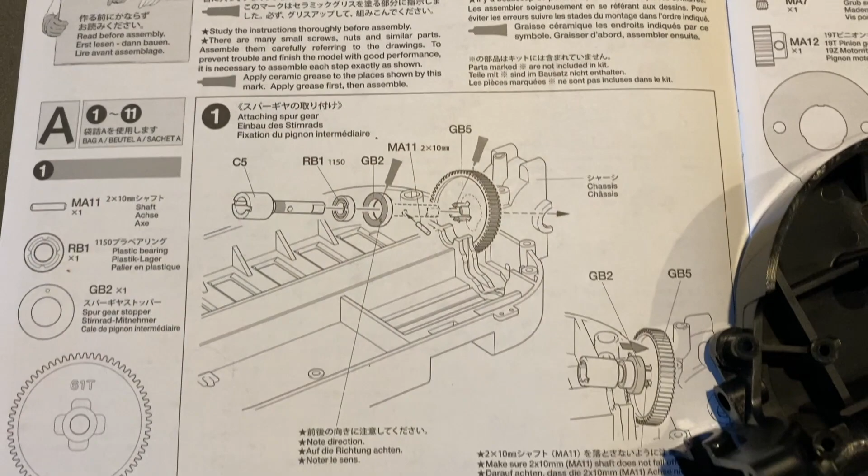In step 1, we start by attaching the propeller shaft and spur gear. As you can see, I've opted for an optional set of gears and propeller shaft.

Although the kit does come with a torque tuned motor, I thought I would step it up to a sport tune motor for a little bit of extra power.

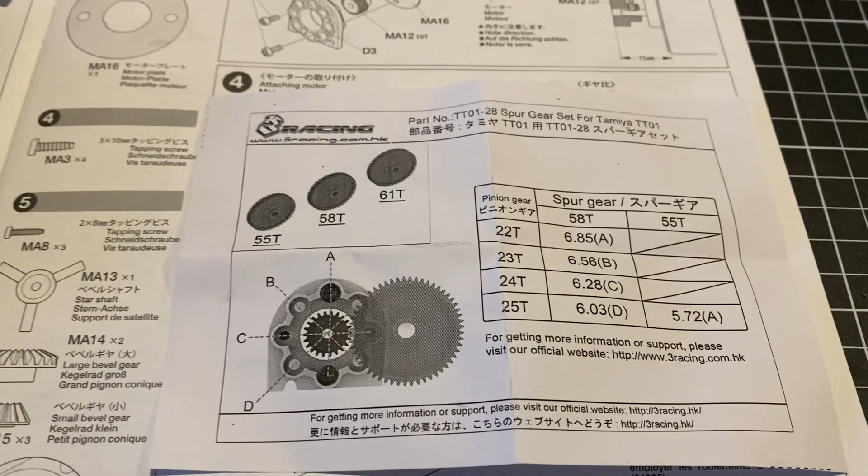As you can see here, we are setting up the rear differential assembly once we've installed the motor.

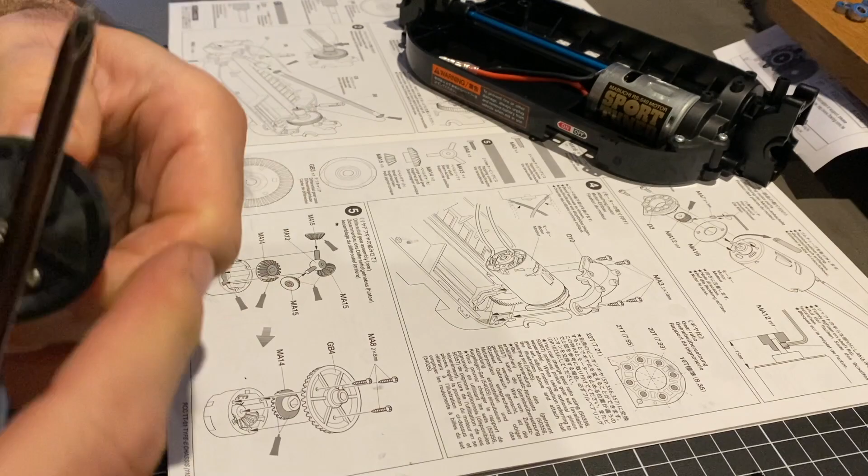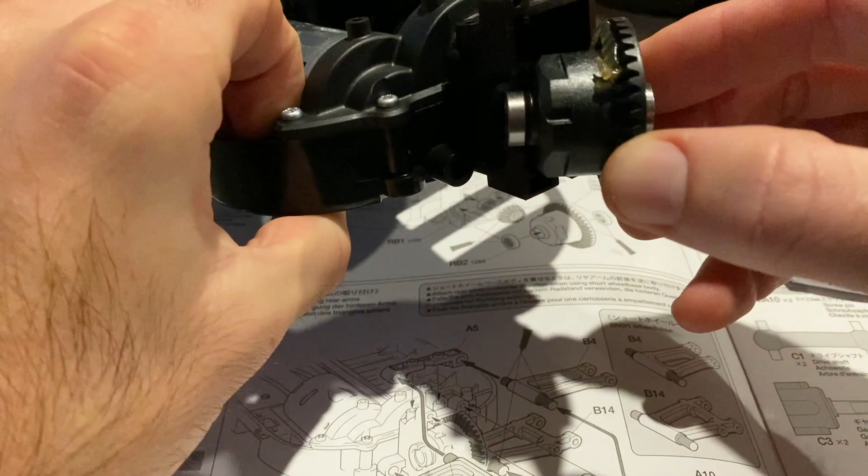The differentials go together quite easily with the bevel gear design. As you can see, I've upgraded the kit with ball bearings.

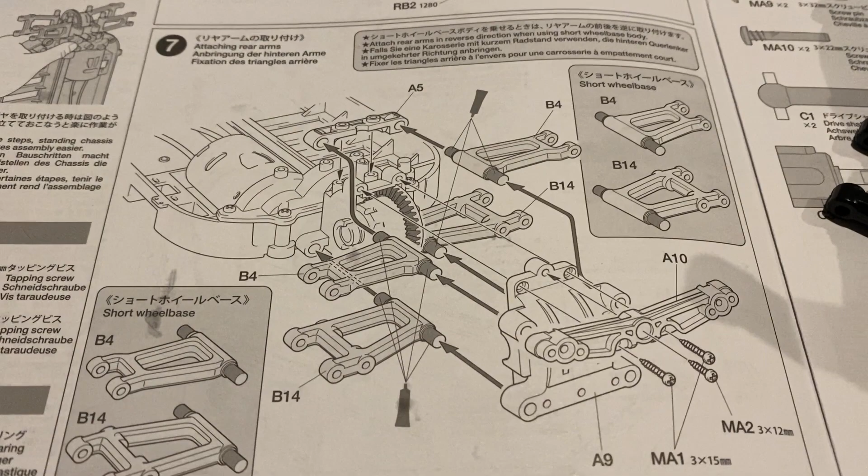Be careful when building the TT01 and TT02 chassis, as when you start attaching the rear arms, you need to ensure that you have the right wheelbase.

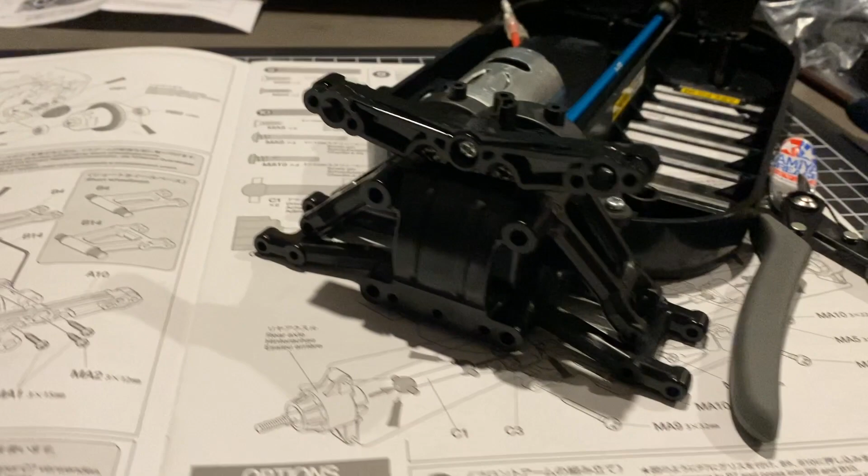Following attaching the rear arms and rear axles, you then attach the rear bumper in step 9.

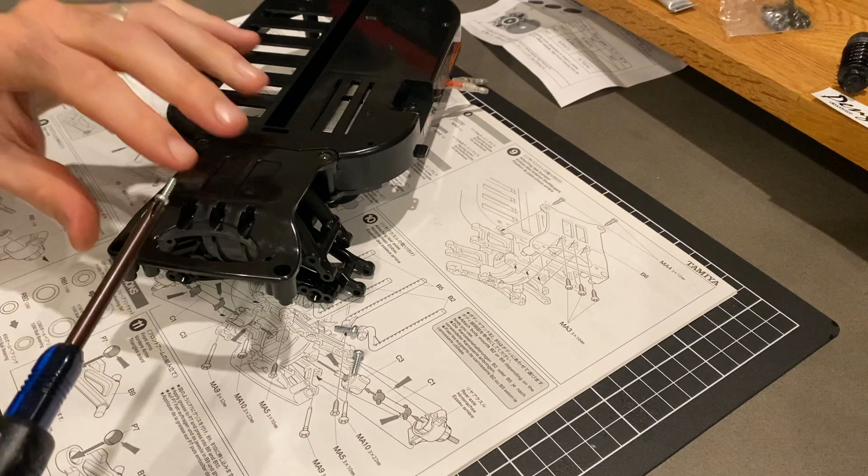Pay close attention in step 10. There's lots going on in this step when we're attaching the rear axles.

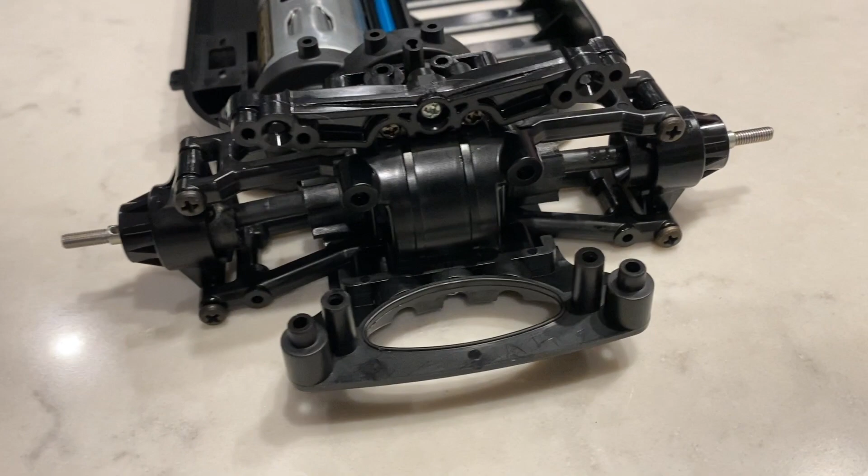So far the chassis has come together quite easily. Just need to make sure you pay attention to the instructions, but so far it's very much a beginner's build.

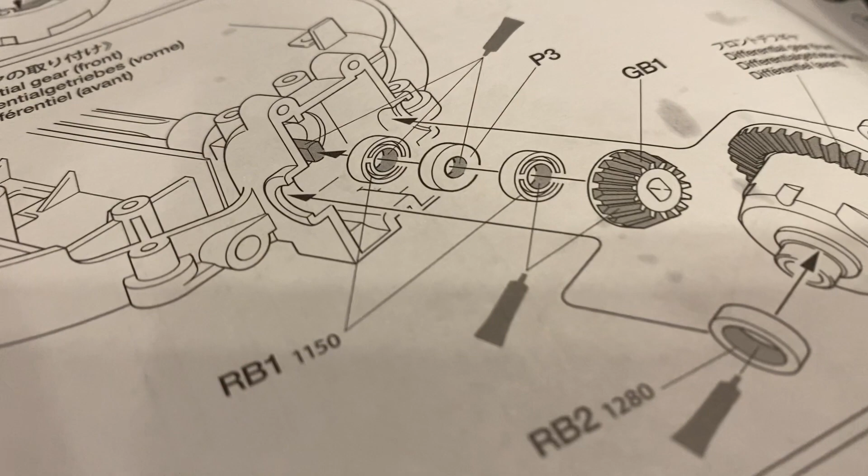Be mindful in step 13 everybody. Lots of people forget to put a bearing in front and behind the plastic P3 part, so make sure you do, otherwise the propeller shaft will vibrate.

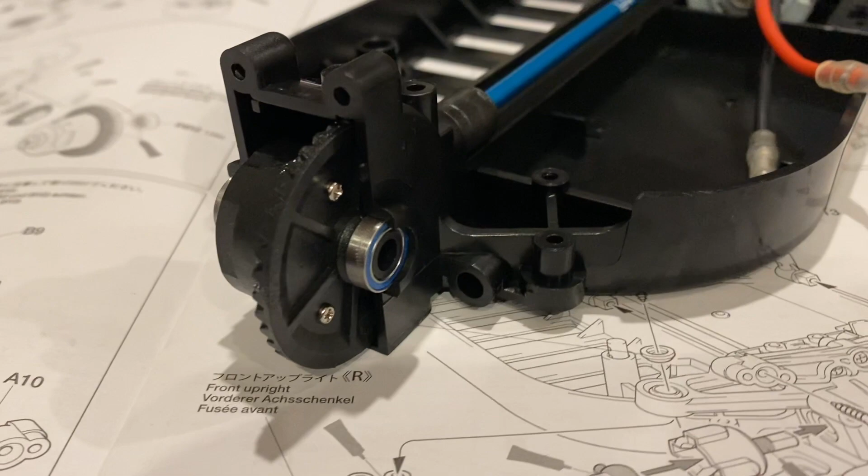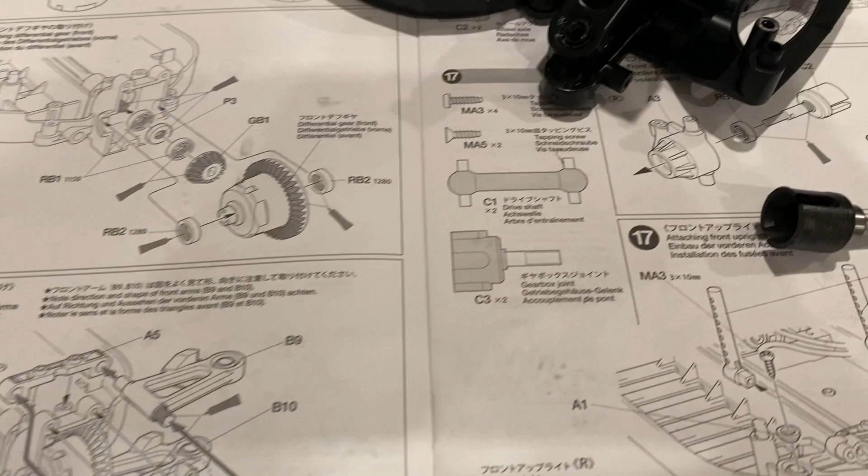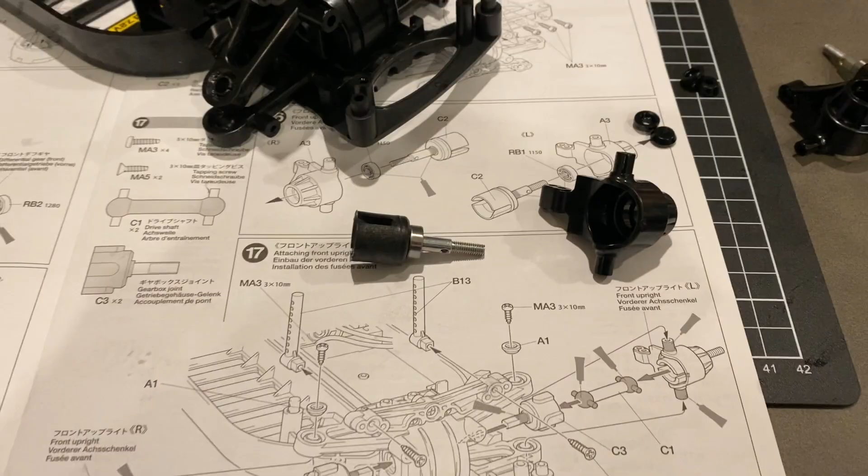So steps 14 right through to 18, we're just pretty much copying exactly what we did to the rear of the car and applying it to the front. So far this is a fantastic build and I would recommend it to anybody starting out in the hobby.

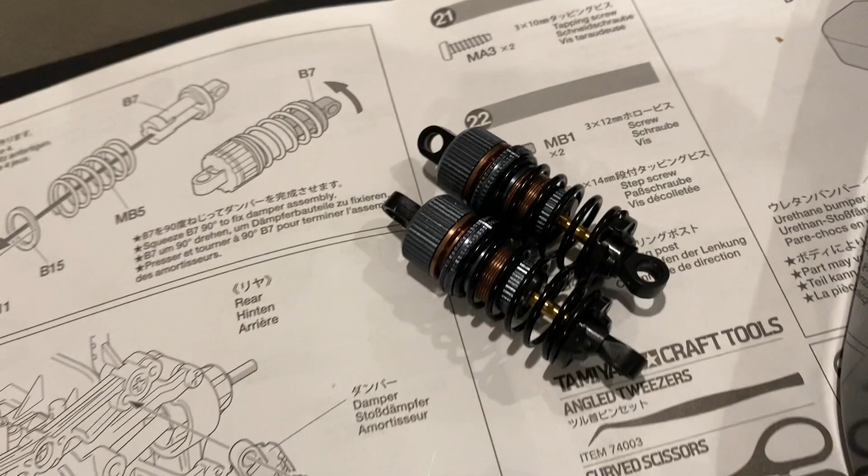Step 19, it tells us to start attaching and building some of the friction shocks, and as you can see, I have chosen not to use the factory friction shocks but instead upgrade to some oil dampers.

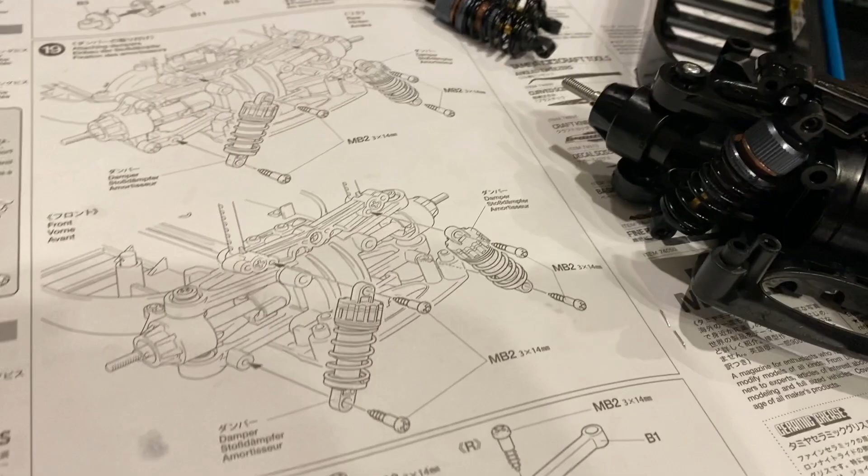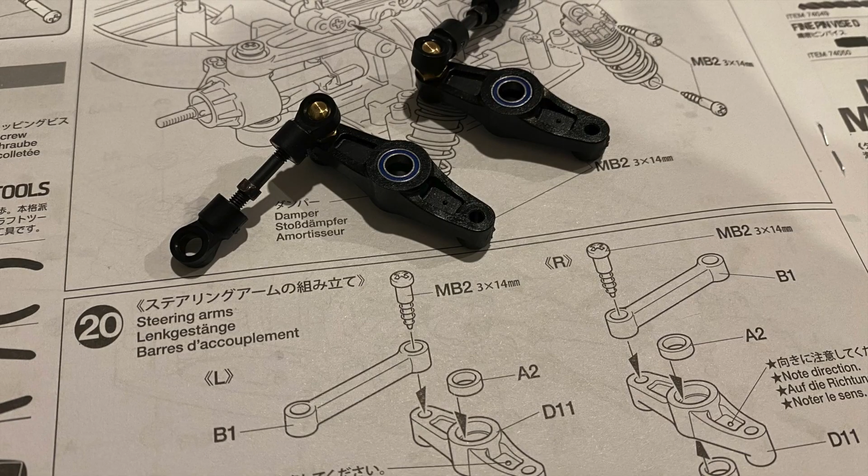Step 20 is the steering assembly. As you can see, I have not used the factory plastic fixed steering arms. I instead have made some adjustable arms and added ball bearings to the steering unit. This will give me adjustability and a lot smoother steering.

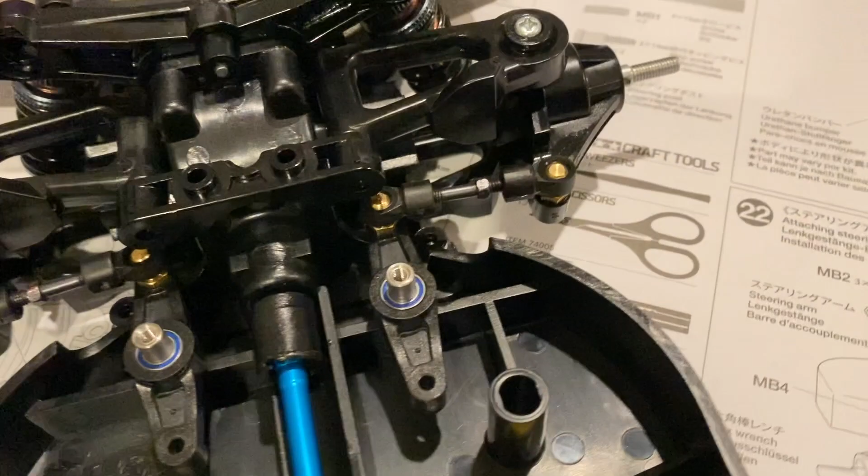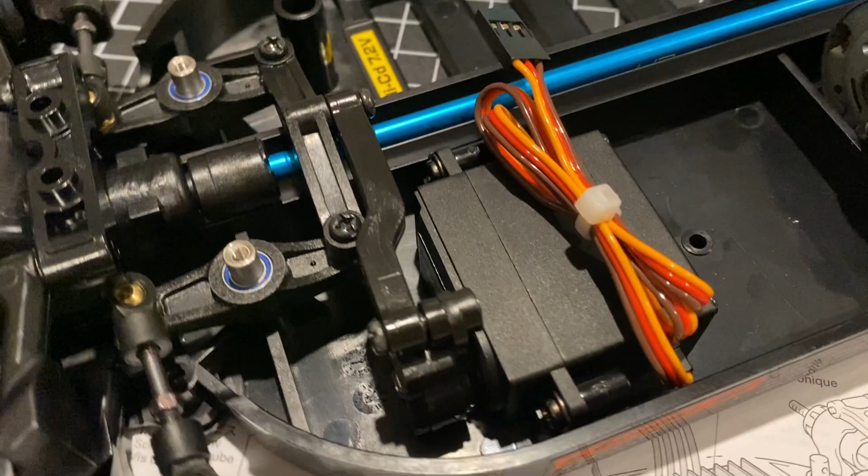And before you know it, it's time for the electronics. Now I've just used a fairly standard servo here, nothing special, and I've opted to maintain the original TBLE 02 speed controller as it will be perfect for the Sport Tune motor.

Once I was happy with the electronics, it was time to install the top chassis brace and the wheels.

So as you can see, I'm testing the oil dampers that I optioned onto the kit. They work very well, and there's no skipping and jumping that you'd normally find with the friction shocks.

As you can see, the chassis came together absolutely beautifully. Very basic chassis, and some of those upgrades I made while building it will definitely make it handle better, drive smoother, and probably perform better on the track, especially with those oil dampers, the full bearing kit, some of the bearings I added to the steering, and the alloy prop shaft. All in all, it's going to be a beautifully smooth kit to drive.

So let's take a little bit of a break, get outside, enjoy some sunshine, then we'll come back and crack on with building the body.

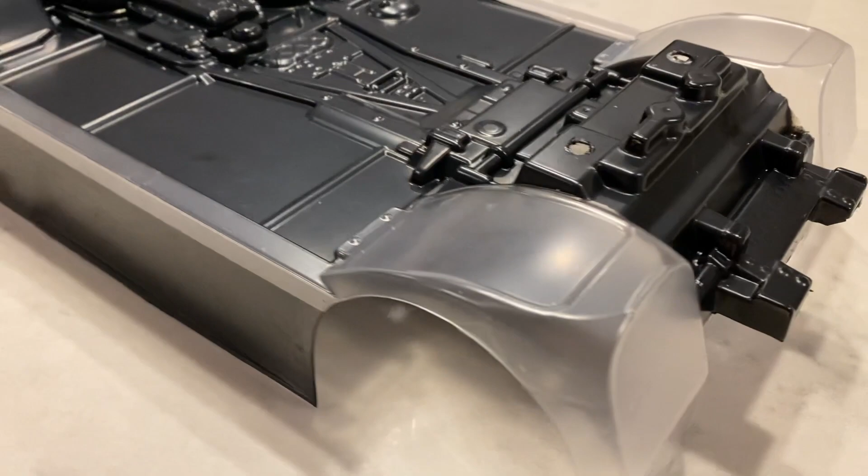Take your time when masking the body. Tamiya only supplies the window mask, so you will need to go and buy some good quality masking tape. I highly recommend the Tamiya masking tape as you get a crisp line. But don't worry, the paint always has a habit of finding a way through the masking, so always make sure you have some polycarbonate cleaner on standby.

As you can see, the box art colours look fantastic together. The red is backed with white and it really gives it that extra pop.

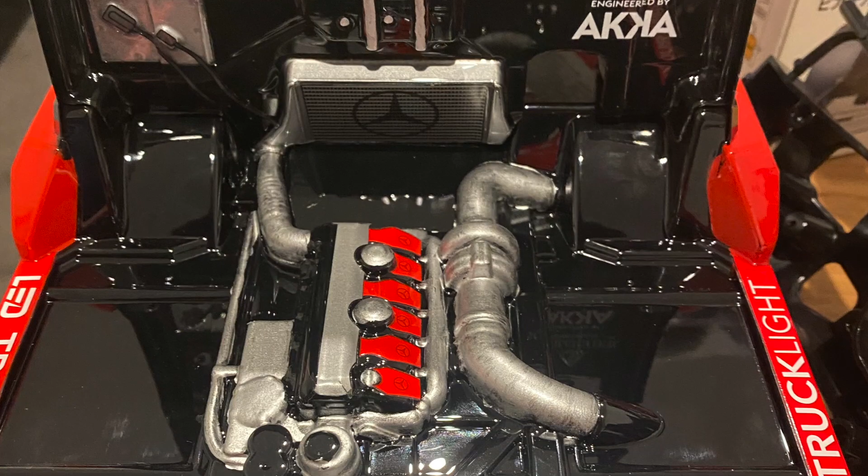As you can see, I have applied the decals and I went a little bit moderate. I didn't go overboard, and I think it's turned out quite nice.

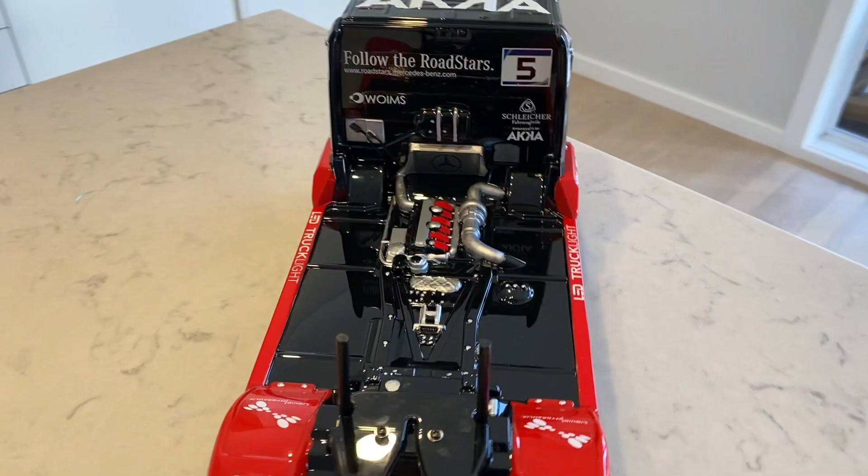I must say that the most rewarding part of this kit is probably the body, guys. As you can see there, fair bit of masking, a lot of cutting and preparation to get the body in a nice state where it looks presentable.

Now, I went a little bit above and beyond, and obviously I went box art just because I do like that black and the red. It really pops. I didn't go overkill with the decals, I kept it quite basic. But I did spend a little bit more time and put a little bit more detail into the motor section here.

I'm not overly sure I'm going to be taking this to club meets and bashing it with other truck series classes, just because during the build I've probably put a few things in the chassis, like the Sport Tune motor, that might exclude me from any club meets. So I'm just going to use this as a nice light runner for myself, and I really wanted that extra detail in the chassis section there, because I think it really needs it.

And obviously there's a few decals in the kit that they give you, but I think that extra detail of the exhaust and the turbo, some of the oil catch cans and whatnot, really make this pop as a kit.